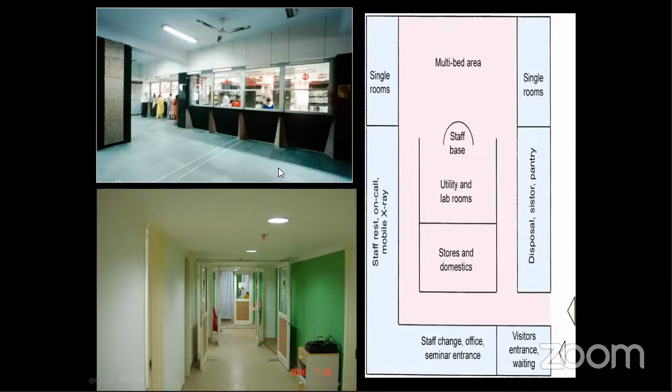For example, there is a staff base and a multi-bed area. There is, for example, a stores area, disposal area. So one essential area where medical staff, paramedical staff will come. First thing is they will change. So if people are entering from here, the first thing is there's a change area. Then you come inside the corridors, and then you enter into the lab area, utility areas. So they are the first entrance of all the visitors, the paramedical staff.

On the left hand side, I'm just trying to show you some pictures of the lobby of one building, and this is the corridor area where there is ample space. Corridors in the hospitals must be about minimum 8 feet wide, or at least 7 feet 6 inches wide, because there are trolleys, there are stretchers moving around. So the norms are given in all the standards in my books.

So this is just trying to tell you how the planning in the hospital starts from a small element to the bigger element. We start in the hospital from micro to macro. Not that we make the whole plan first and the site plan and the box and then go inside. No, first you have to divide the sections separately.

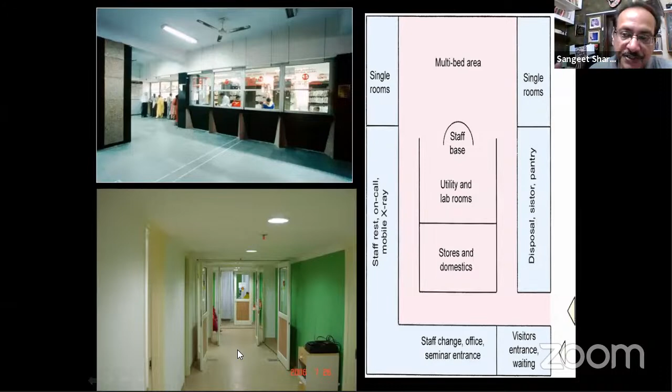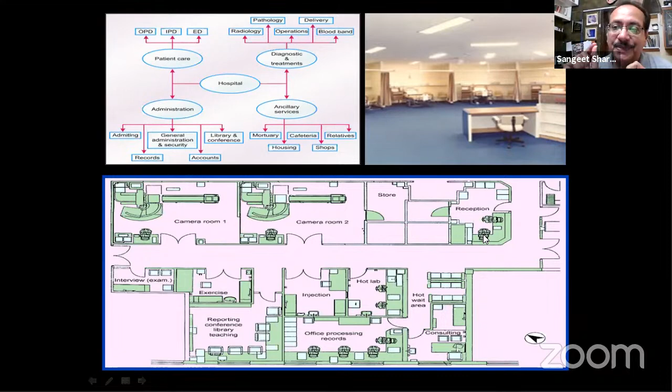उनको इंटरलिंक करना. So every element or every point in a hospital is a hospital in itself. उनको पहले एक एक को तिनका जोड़ के फिर उसको सारे को एक whole करना. What I'm trying to say is you have to be careful in minute planning, inward to outward. Let me go further. You will enjoy this.

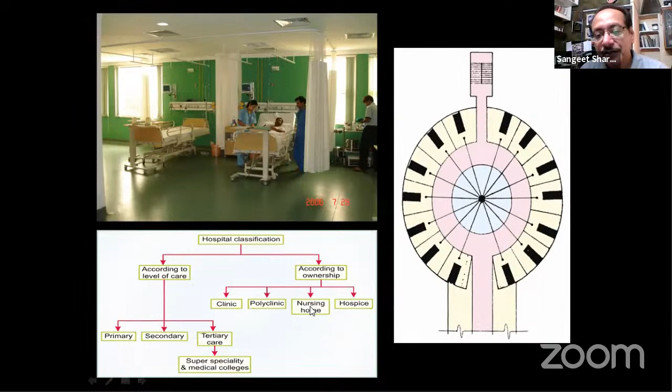Now let's see. Like any other buildings, also in hospitals corridors play a very important role. Their size and their width are equally important. Please read the norms. No corridor must be lesser than 7 feet or 7 feet 6 inches. You can't have any column in between. They have to be absolutely obstruction free.

The corridor from which all the excessive material, extra material, bandages, and other things are taken from the operation theaters don't come from the clean corridor, they go from the dirty corridor. So there is a continuity of corridors on both the sides.

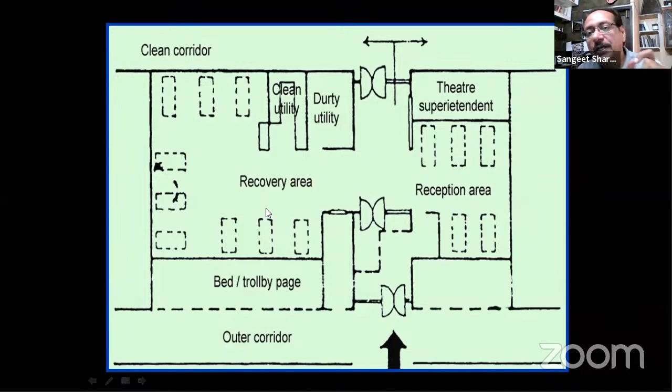Now here, the theater superintendent has to be around to supervise the reception area. Now you enter here into the clean area, the reception area. You make the stretcher wait, and then the theater superintendent will say okay. Then you go to the recovery area. So there is a typical circulation diagram. There's a system by which you will attend every area.

Now, friends, this is one of my buildings in PGI. This is a Pediatric Center. These are government buildings, but still you can see that there is no artificial lighting on. ये तो गवर्नमेंट बिल्डिंग में सब वो बत्तियां जग रही हैं, बुरा हाल है. इसमें कोई ग्रेनाइट इस तरह की चीजें यूज नहीं की हैं, because we are answerable to this.

Natural light is coming, the diffuse light, and there are corridors which are non-air conditioned. So you enter here, there is a reception area, there are skylights, there's a lot of freedom so that you are not claustrophobic. Remember one thing, people entering into your hospital panic. उनको तुरंत डायरेक्शन देना है, उनको इमीडिएट बताना पड़ेगा where you want to go, how you want to go.

There has to be signage; होने के बावजूद हिंदुस्तान में लोग खो जाते हैं. There has to be very efficient planning, the first planning when you enter into the lobby. Now, main entrance, उसमें outpatients भी आएंगे, inpatients भी होंगे, emergency वाले भी होंगे, services होंगे. It has to have a proper circulation, and there is something called patient protection. Shortest routes to the areas where you want to go. Separation of dissimilar activities, control and monitoring.

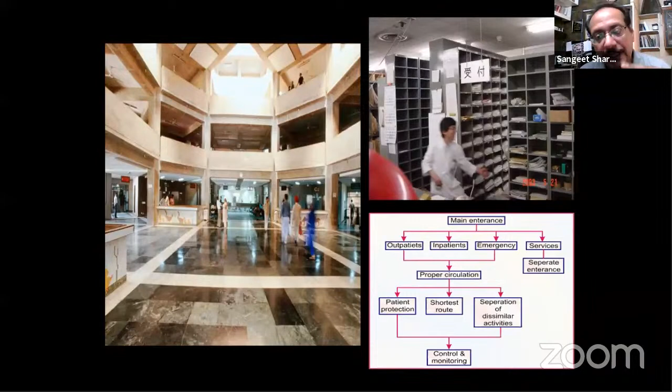I've told you about these circulation diagrams. Now we will attack the actual plan so that you are not confused or scared of planning. There's nothing to be scared about. I'm only trying to guide you how to make a planning.

Now this is the diagnostic area. अब इसमें थोड़ा सा accident and emergency में जब आते हैं, when you enter into the emergency area, you need all these facilities instantly. Inpatients हैं, operating department है, उसके बाद ICU में डाल देंगे उसको, coronary care unit, pathology में जो test होते जाएंगे, diagnostic हो जाएगा. All these things are part of the emergency.

Now, friends, you must know these words. अब pathology अगर आपको नहीं पता उसमें क्या होता है, tests take place. You can't be writing here "area for testing blood." So you have to use correct terminology in terms of hospital design. Be careful.

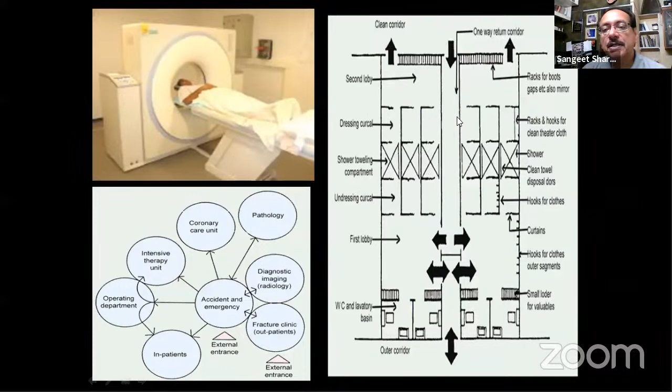In this diagram, for example, you're coming to the lobby and then there is an area which is dressing areas, and I have this better in the next slide. I'll show you. What may be important in hospital design is a good treatment. Of course, we need good doctors, good hospitals; avoid a sterile look. I have only spoken about sterile interiors, but outside, try to avoid the sterile look,

or the patient will get a little alarmed. Now, this is the kind of storage which is normally there in the hospitals. It has to be very quick. It has to be very planned. So, also the equipment's entry to the services is different, friends. Entry to the gases is different. Entry to the emergency is different. And entry for normal OPD, outpatient departments, is different. There are a lot of entry and exit planes which happen in hospitals.

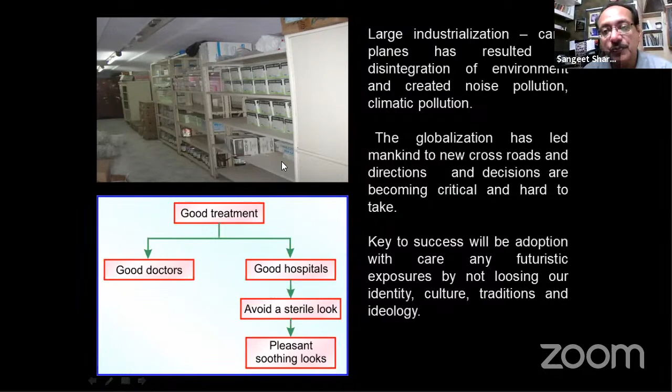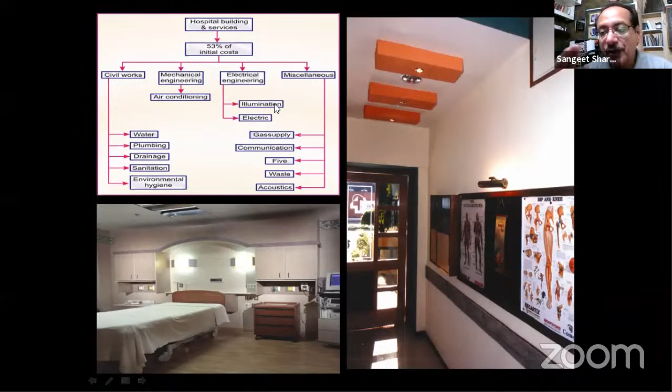Now, this is the kind of nicely lit, illuminated foyer which is required in your OPD particularly, because a lot of people are going to sit. There must be adequate distance, adequate lighting, adequate signage, the right kind of air conditioning system for a foyer. So right from the foyer OPD sitting area, your planning is exposed. You are exposed as to how much you know about hospital design straight from the lobby area.

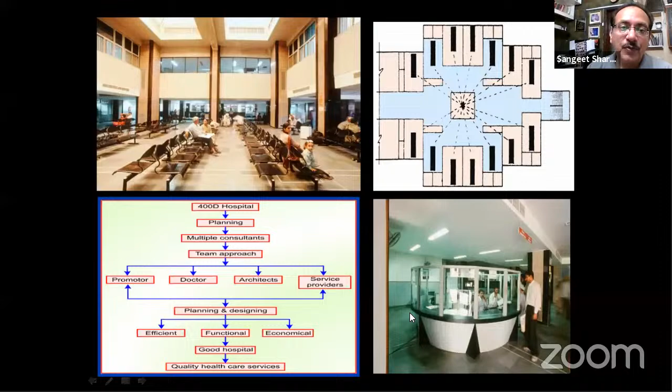If somebody is asking a question at the reception, it must be shielded. So you have to be careful about small things. Of course, at your level in third year, I'm not looking at a very highly intricate kind of design, but it has to be correct design.

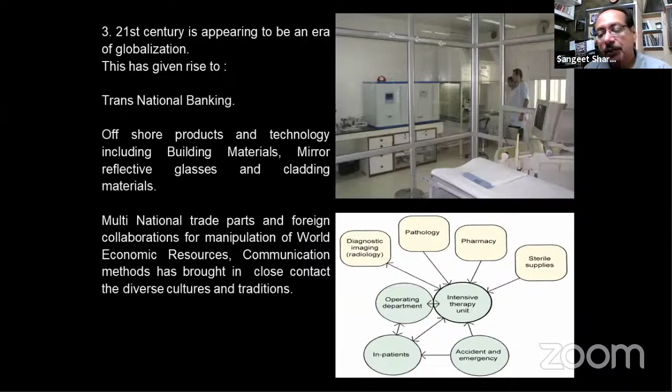It all depends on the kind of area you have and the size of hospital. But I'm giving you the right advice as to how the paramedical staff must move. And now see this building, the Advanced Pediatric Center. These are the corridors that we designed where the paramedical movement takes place. So if there are hundreds of patients sitting here, they don't cut across them. They have to provide instant services, equipment leke aana hai, bandages leke aani hai. Of course, there's a lot of aesthetics involved. This is a paramedical corridor.

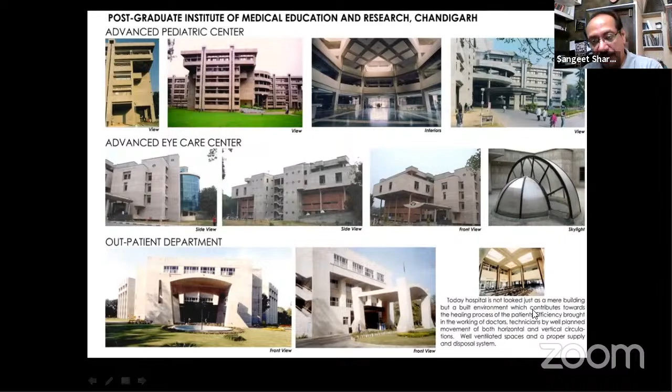This is a beautiful hospital designed in PGI. It's eye care, which is of international standards. This is an OPD area in PGI. I'll show you the further planning of it slowly.

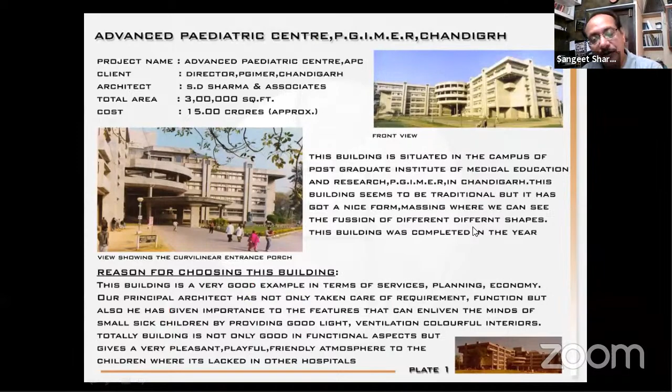Now, for example, don't think of it as a pediatric hospital. Just see it as a normal hospital.

Now in site planning, this is how it is placed. Central foyer area. This is its reception, this one. You enter here, there is a corridor here, and there are 4 basic elements of the hospital which I told you on the third slide: diagnostic areas, OPD areas, ward areas, and beds.

So you are guided and you go into that particular zone. There's a ramp here, so this is a kind of a thing which you go into, and this is an emergency area. You see these wings, flowing wings. This is the corridor, but see the amount of services, the weight it is taking.

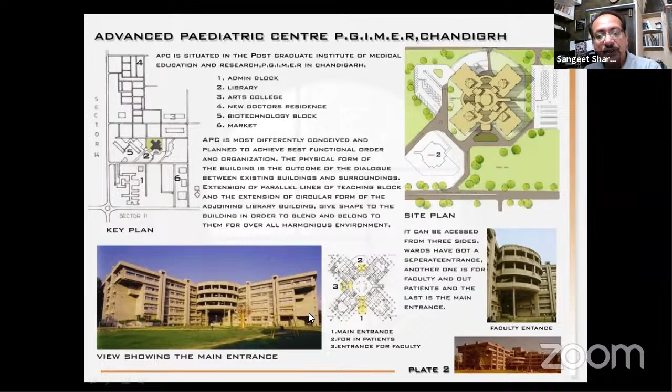Now this is the kind of plan. Enter here, you are in the central foyer, reception areas. Then there are services at every block, lift, staircases, based on your design, based on your capacity. You enter here, there are rooms, and there's an open skylight in this area for the light. So it all depends. If this is OPD, then there are rooms of OPD. There is diagnostic areas.

So we are dividing our planning into various wings, but it is all interconnected. Privacy is there, connection is there too. That's the catch in a hospital.

You're seeing the elevations. You cannot lose the thought that you're an architect. Buildings have to look good, no doubt about it. And that's how it goes.

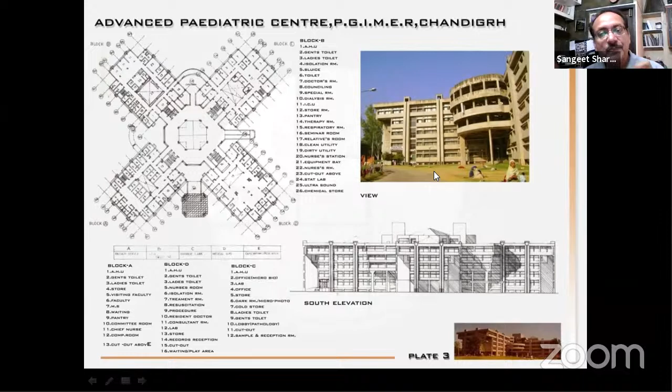Getting into more details, friends. If you ever visit a hospital and visit its service area, visit its basement, you'll be shocked how huge the equipment is. At your level...

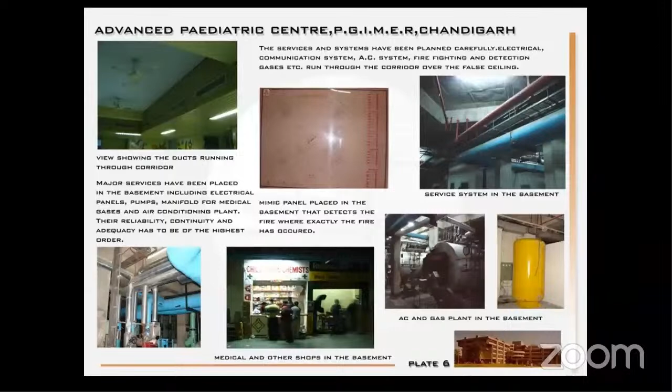I'm not asking you to design such elaborate services, but please see more than seeing a hospital interior, see the service. You realize how important it is. These are the kind of ducts which run all through. You need space all through the interiors for the ducts to run through. You need this kind of equipment.

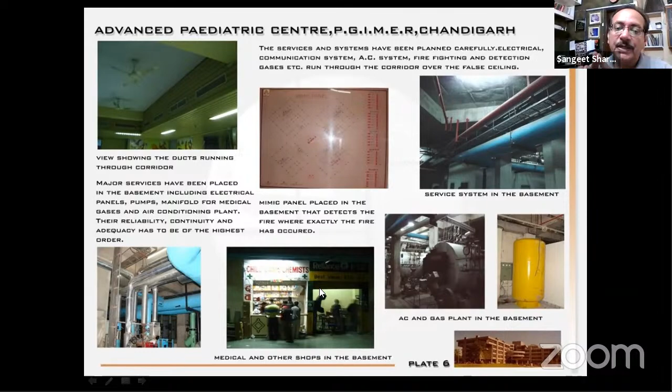The medical and shops are there. So a lot of planning is involved, even in the service area, in the basement. I don't know if you have a basement in your design. It is a good idea to give a basement, because there all the services will be, all the ancillary shops will be, maintenance areas will be, engineering areas will be.

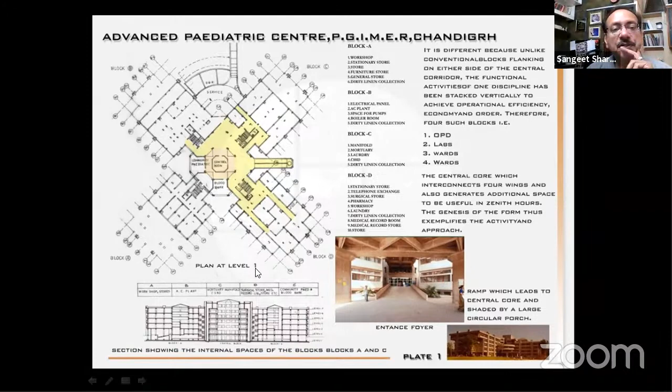So providing a basement, be careful about where the ramp movement is, how the approach to parking is, how its exit is. So these kinds of things you have to design very carefully.

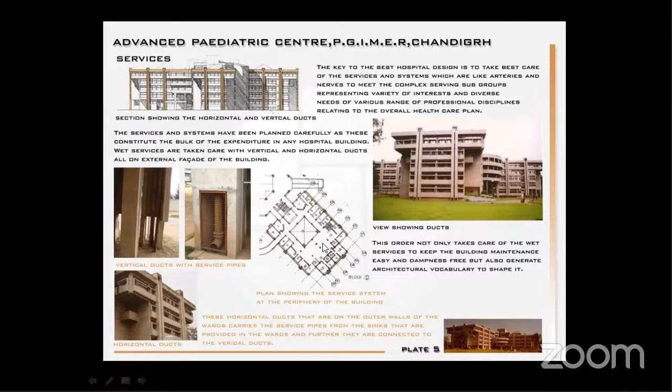If I take one block, suppose I take one block, and then I know that there's a corridor here. There's a waiting area in front of every OPD. There's a common waiting area, and then there's a small waiting area in front of every OPD. Visit these buildings if you can in PGI.

You learn best in architecture by moving around and looking at the buildings than from the books. Small detail.

Service is coming from above, see how it is enclosed, how the rainwater will come out. Beautiful, all this. See these cantilever areas and how the effect of the sciography, the sustainability is there. It's all self-explanatory.

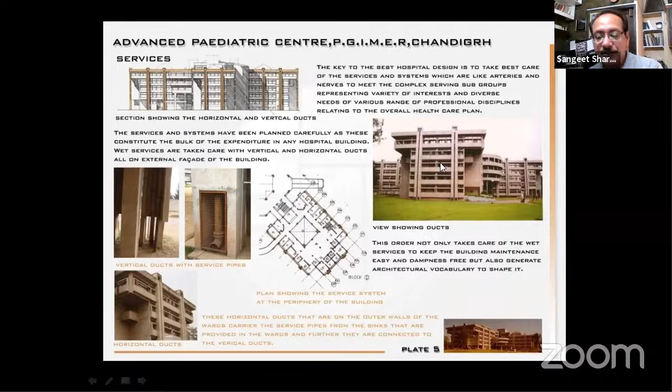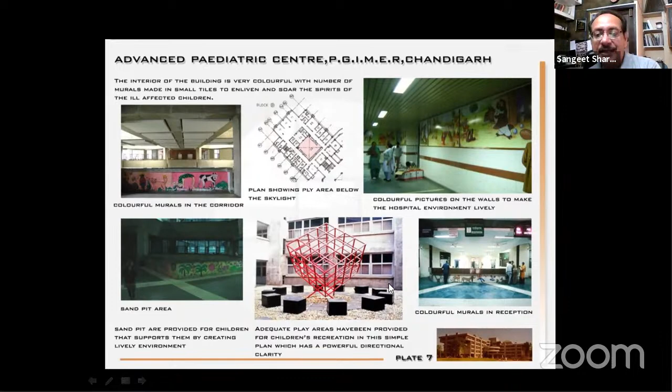Interiors, false ceiling, the courtyards are all well kept. They're landscaped so that you are engaging the patient. Again, I showed you the large waiting area, the smaller waiting area in front of the department, and the kind of skylights which you use. These are all architectural features which come after you have prepared your basic interior planning, functional planning inside.

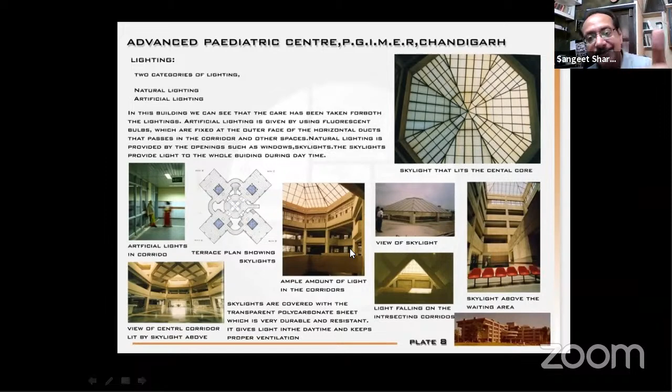Then there is the flooring pattern, the cantilever area, the structure system is very important. If you're going to give columns in your waiting areas, in your corridors, it's not acceptable. Are you going to give columns in operation theaters? No. Are you going to give columns in ICU areas? No. So there has to be a systematic grid, a planning where columns come in the walls or in areas which are non-obstructive. You can't place your structural system at random.

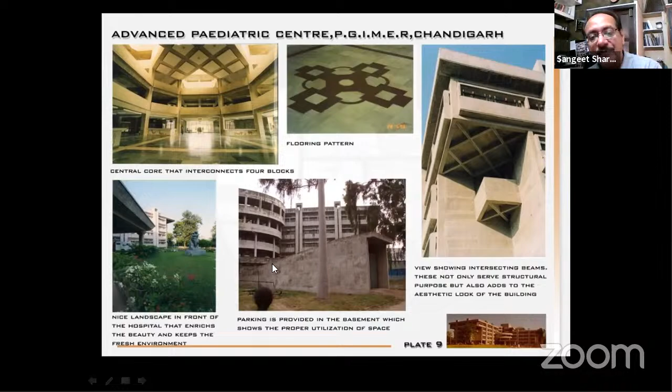As you grow up - this is the kind of ramp which is going down for the parking. It is covered. See these areas which go down into the basement.

Lift areas - how many lifts are there, what size of lift, how many passengers. Very important. Remember, these are stretcher lifts. You have to have a stretcher lift, you have to have a passenger lift. So whether you need 2 or 4 depends on your design and the kind of hospital you're designing. But I think minimum 4 lifts are required along with stairs.

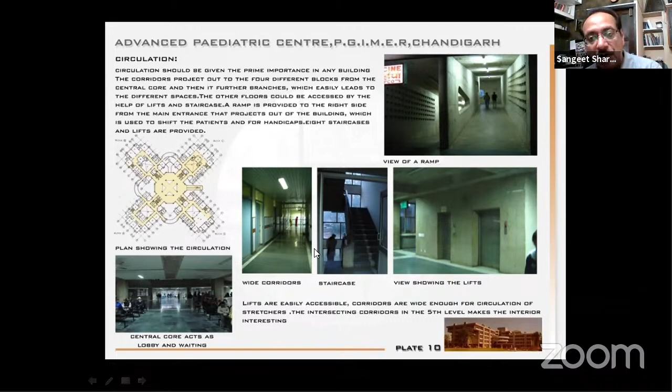Don't forget the fire escapes, friends. The kind of fire escape we made when we built this, it's almost 10-15 years old now. The fire norms are stricter nowadays, so be careful when you design. This is a kind of oval duct which is used at the corners.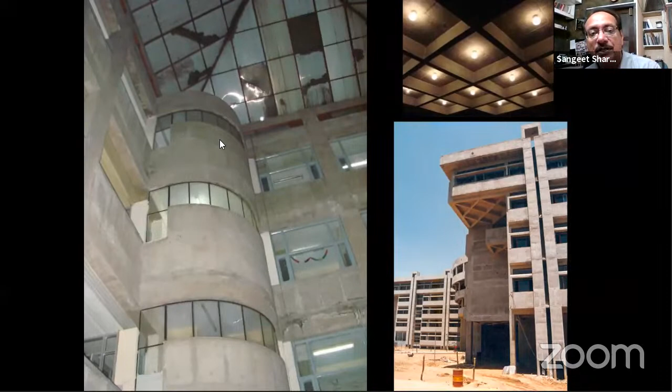Some major pictures, all these are services, in the eye care center. See, I said inside to outside - outside must also be beautiful.

Outside, we are designing in Chandigarh, so I have to design in exposed concrete and bricks, but it's beautiful - the structural system, long columns, the skylights, basic plan.

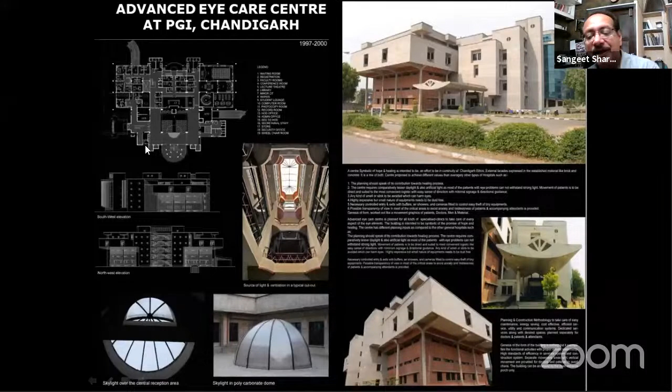Now see this, it's a fire escape made in the center because this distance vis-a-vis that distance has to be such that you need a fire escape. So there's a common fire escape, but it blends as part of the elevation. Be careful when you are designing this.

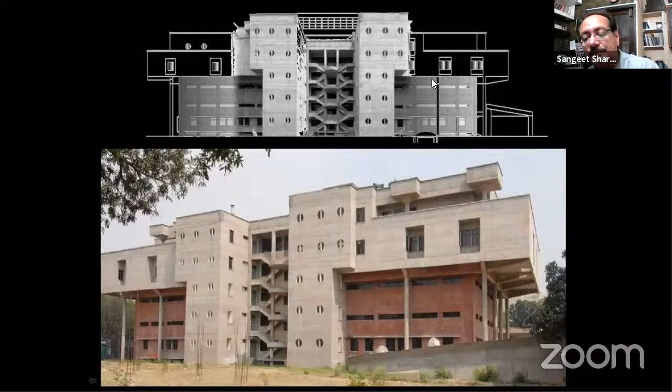And this is the OPD. Now in an OPD, you need to have services, you need a big porch because ambulances will come and a lot of people come. 4,000 patients come to the OPD at PGI Chandigarh every day - every day.

This is the kind of service ducts going up and down, and the porch - I showed you this picture before also - with wide open areas to sit. Be careful about the guidance, social guidance, and long platforms for services.

This is the most modern building which I designed in Coimbatore. It's a 750-bedded hospital for a medical college.

If I explain on the model, friends, this is kind of a conference area, huge, and in the inpatient area, people enter here and register themselves here. Then they go inside slowly, and these are the kind of rooms which have been allocated. Being in Coimbatore and a private hospital, it's non-air conditioned because there's a lot of breeze there.

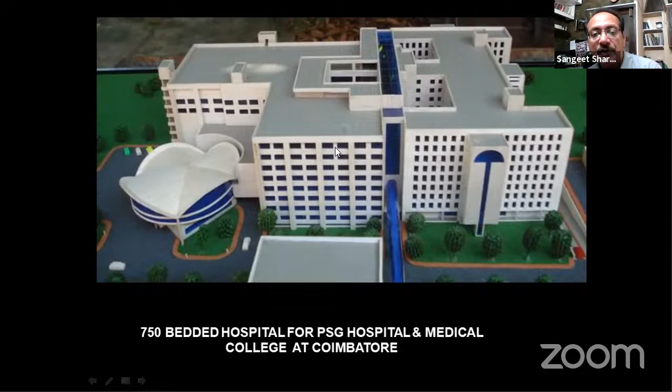We did a very different design outside - we gave a lot of big area for relatives to sit rather than having them scatter on the corridors, on the roads. Give them a beautiful area. Fire escapes are all there.

You can see this huge road here and a huge waiting area. The waiting area is also equally planned. This is the conference room, a huge conferencing area, which is connected.

You see these skylights—they're raised for cross ventilation. Please be careful when you have to provide ramps; there have to be handrails. Be careful, because you have to design a disabled-friendly hospital. Don't miss out on all these things.

These are the basics. Now this is the kind of site plan I'm trying to show you. This is a different feature because this is an old hospital, so it has to be linked with this tube here. You come here, like this entrance, you drop a patient here. There's a whole waiting area, so the relatives stay outside while the patient goes inside. OPD is here, and IPD is here—that's inpatient.

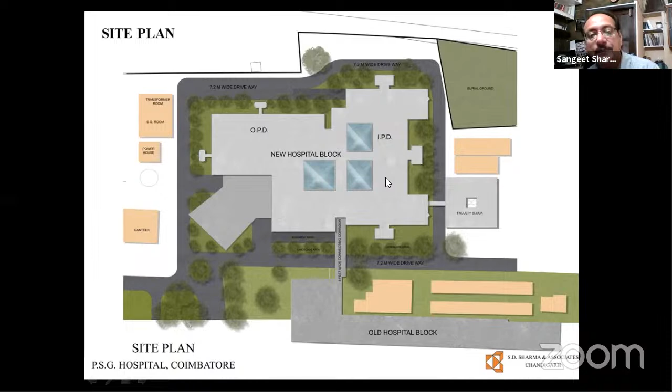If I just try to show you the ground floor: main entrance, big foyer, lifts—first the service area, then the registration area. I'm standing here, looking at this. Then there are departments, radiology, most important—first thing they will ask you is to get this tested, get a blood test, and so on, radiology.

One department here, but don't miss out on all these blue areas which are services, fire escapes, services, big registration and billing areas. You don't give bills at the registration—you are registering a patient there. Afterwards, you bill here. So there's also something called the insurance area these days—everybody is insured, so there has to be separate areas for these things.

Think of this—then you enter here, and there is a passage for the inpatients. If an orthopedic patient needs it, these are the rooms for the doctors. There's a small waiting area here, a large waiting area here, and here also.

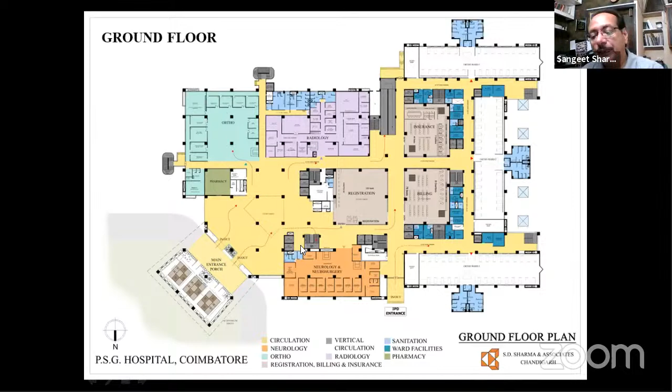Then you enter into the ward area. Imagine how much a doctor or nursing staff needs for one patient lying here—how many things are required to serve them, so that he is good, is well, and is alive. These are constant—a lot of things which you will design, friends.

Has to be constant, one above the other. Toilet areas, one above the other. Services, one above the other. Staircases, lifts—it's all repetition. So once you decide on these areas, the rest is all interior. You have to have great interlinking between all these service areas, great interlinking between the OPDs, and the correct passage into the IPD area.

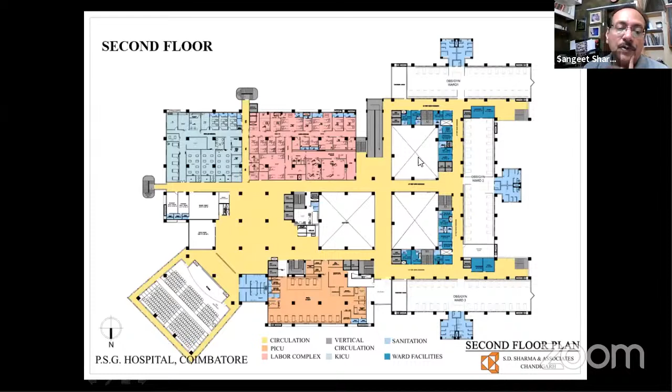Now, on this floor is the conference room. Third floor, again similarly, departments, facilities—different colors indicate departments.

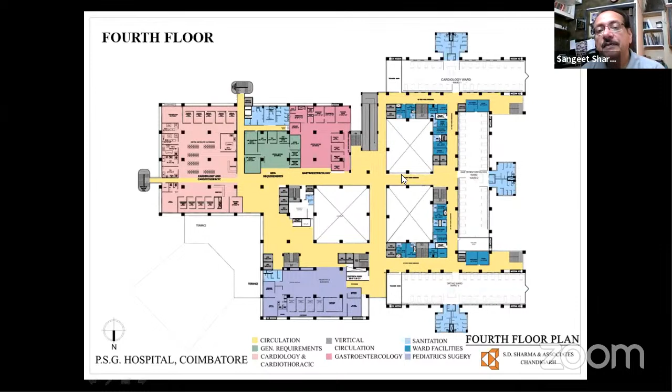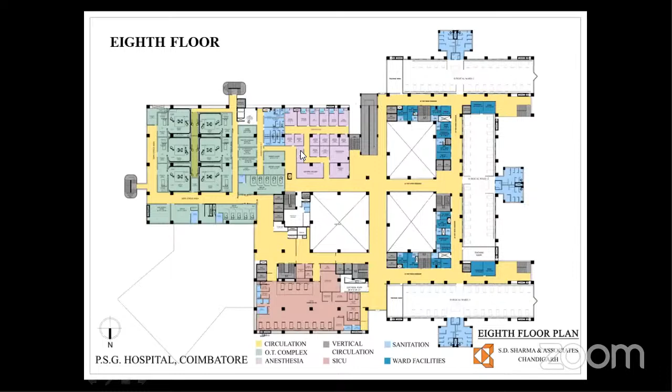We kept operation theaters on top because we don't want normal people, normal public, to enter. Secondly, all the services are catered individually from the top—it's more sterile. The fewer bacteria and people enter, the better. All these are operation theaters, and the paramedical areas assist the operations. So given these three skylights, there's a lot of air ventilation, which is constant, all services constant, a typical block kind of plan.

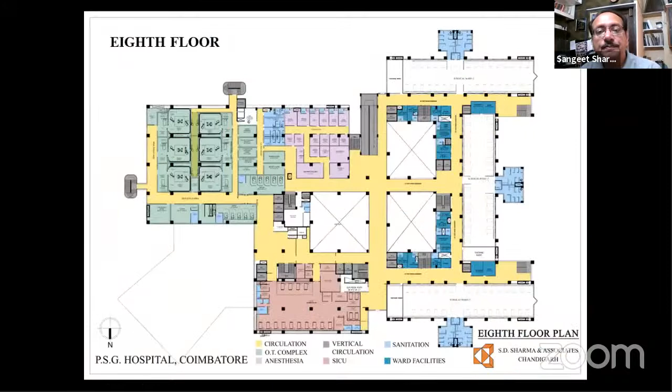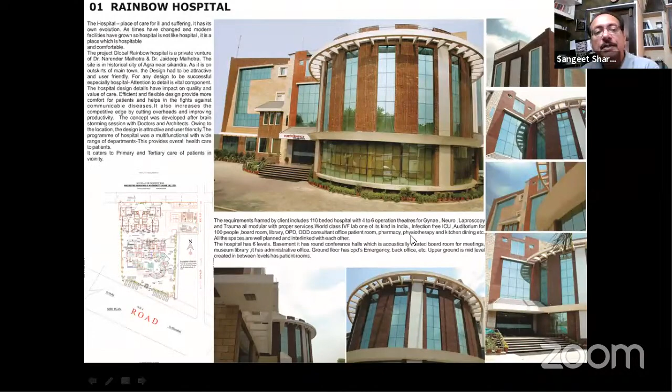So if you want to see how the plan translates into a building look, and this model—this is a small hospital, 110-bed hospital, in Agra.

I've told you, I've taught you enough—you will not go wrong. The basement floor, just see it fully: with services, administration area, auditoriums, a basic hall, cafeteria, kitchens—all is here.

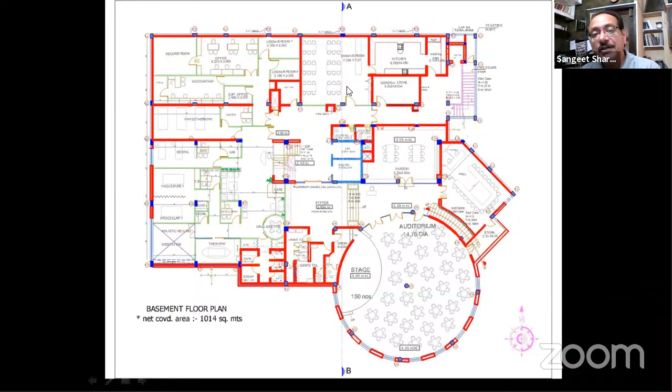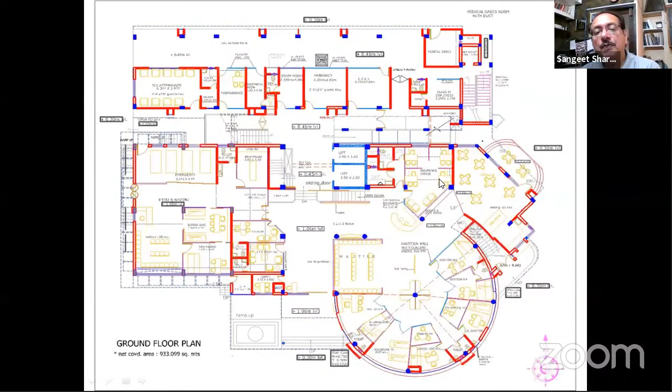Ground floor, enter, and I have all these services areas. I have waiting areas, OPDs. So there is every nook and corner which is planned, a proper plan.

This is the ward area. With ward areas, you have services, you have shafts, you have ducts on the sides to bring services. You have areas for services, you have staircases, you have lifts, and they're confined—they're in an area which is confined.

There are private bedrooms, private wards, so they have an attached toilet, and this area becomes like a hotel—design them like a hotel. So it's a kind of link between designing a hotel, a laboratory, and a hospital.

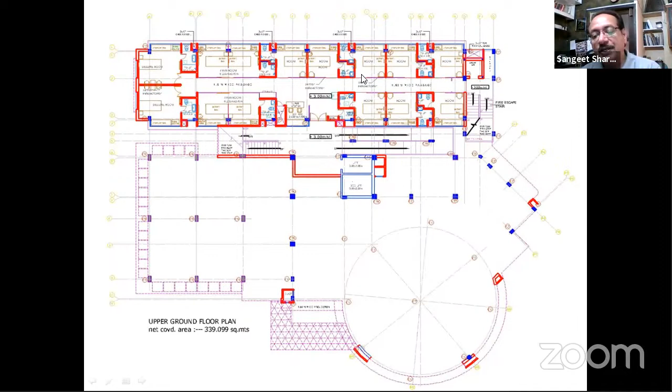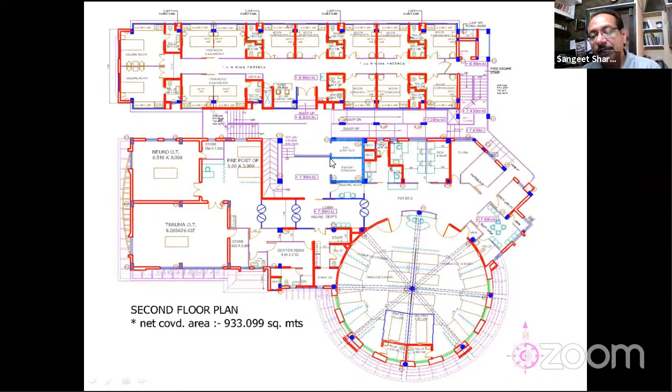So the first floor again: laboratories, doctors' areas, OPDs, ward areas. Every floor has a ward area, but the ward area is segregated. As I said, services are repeated.

The more there is repetition in your plans, the more efficient will be your plan. More or less, you will see the ground floor, first floor, second floor. It's almost the same. We want you to be repetitive in terms of vertical circulation, fire escapes, ducts, toilets, ancillary works, utilities, gas banks. We want them to come straight up, straight down, without obstruction. That's very important.

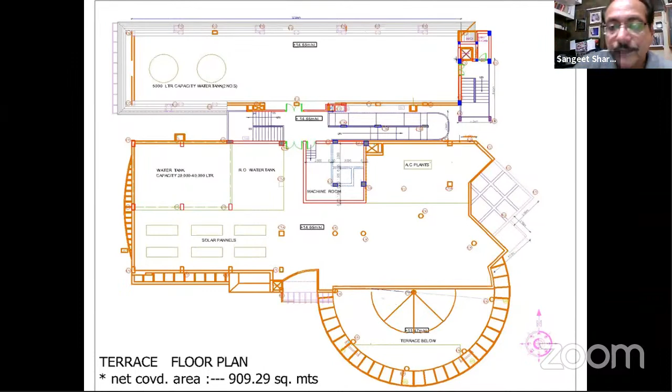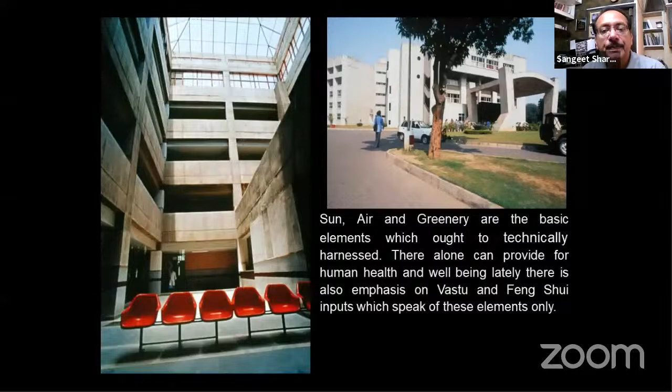Sun, air, greenery. But friends, all is architecture. I'm talking about services, I'm talking about function. Yes, I am. But at the end of the day, it better be a good looking building. That is what is important.